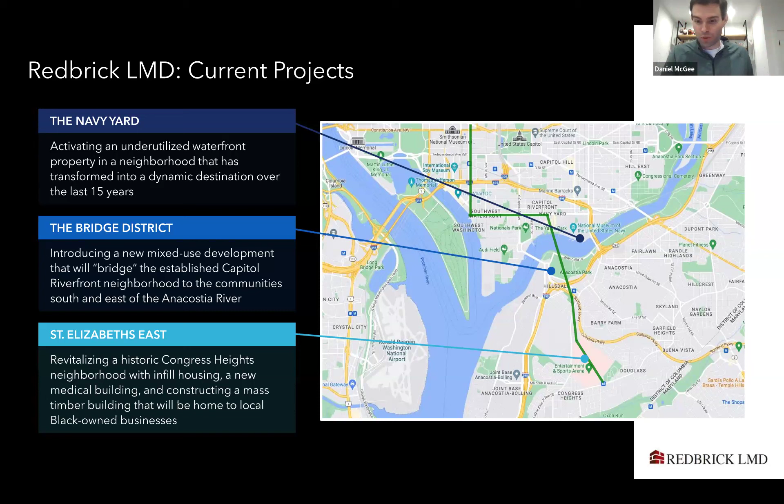I'm going to be speaking solely about Bridge District today. We have other people on my team who would be more appropriate to speak about St. Elizabeths East and Navy Yard, but they're fascinating case studies as well. Feel free to go check out St. Elizabeths East. The new Sycamore and Oak Mass Timber Pavilion is a really cool example of some work that we're doing. But today we're going to talk about the Bridge District.

This is a 757 unit multifamily residential building we're building to a zero carbon standard. It is under construction right now. We're going to top out the structure in May, so I think we're on floor 9 or 10 of 12. And it's right on the landing of the new Frederick Douglass Memorial Bridge.

And we're building this to a zero carbon standard from a total life cycle approach. What I mean by that is we're going to fully account for the carbon emissions throughout the project's entire life cycle, not just the part that we own and operate. We're taking responsibility for the carbon emissions that occur all throughout that life cycle.

We take a reduction first approach, so anywhere we see carbon emissions, we're trying to reduce as much as possible. And then lastly, we're going to offset those emissions, the embodied carbon generated through completion of construction, through a one-time offsetting project. And then from then on, all the operational energy will be powered 100% by renewables.

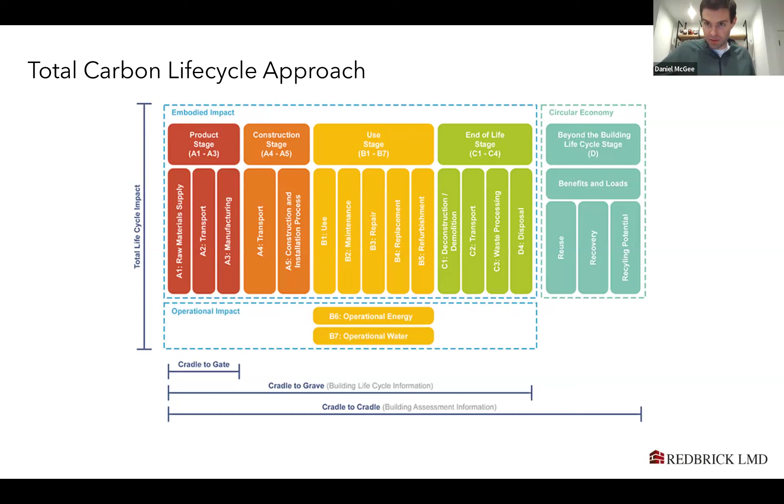In raw data, but we found that while there are some databases out there that have some estimates, we wanted to further those databases with real primary data, so we can educate ourselves on how much emissions are actually generated during this process, but then feed that back into the databases to make those better. I'm going to first talk about the embodied emissions - emissions generated from cradle, raw materials, all the way through construction of a finished building.

We're tracking a 30% reduction in overall embodied carbon emissions relative to an EC3 baseline, which is one of those baselines I talked about that has good industry data, but like I mentioned, we're looking to make those a bit better. The big movers here: concrete, steel, your building envelope, and then your interior finishes. Those are the categories we really honed in on in our attempt to reduce these emissions.

While we achieved a 30% reduction, this was us throwing almost everything at the wall for a building of this type - it is concrete construction. In future phases of our bridge district development, we're looking at trying to replace concrete with other structural materials like mass timber or carbon capturing concrete. We're going to continuously try to learn from this one and push that reduction even further. But this was kind of us throwing everything at the wall, and I think we're at the physical limits of what we can do, given current technology and this construction type, which are two big caveats to that statement.

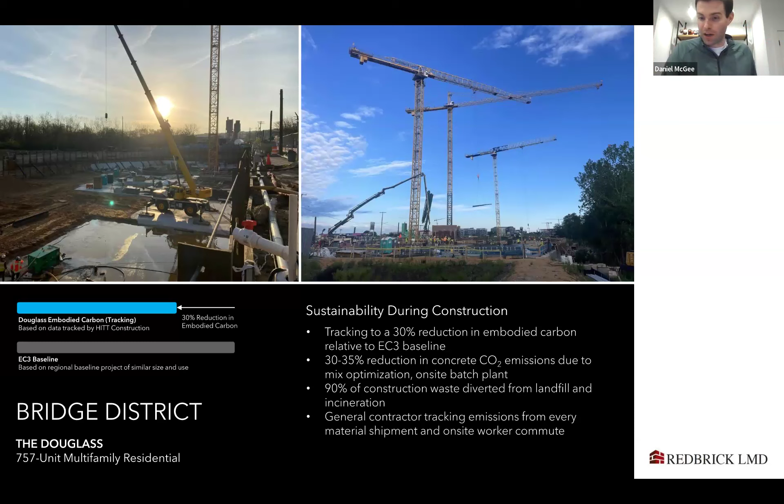Like I mentioned, once we track all of this embodied carbon, we are going to invest in an offsetting project to offset that amount of carbon. I talked about the concrete - one of the strategies for our embodied carbon reduction was to really optimize every single concrete mix that we put onto this job.

In the process of creating cement, the cement production process is very carbon intensive, and so we made moves like replacing the limestone that we use in that cement process with a byproduct slag, which is an iron manufacturing byproduct, as well as putting the concrete production right next to our site.

We do have the luxury that we have a couple acres right next to our site that we were able to put a batch plant on. And what that allows us to do is reduce the transportation emissions that are caused by trucking the concrete.

Imagine a building of this size, and how many concrete trucks need to come through. But mixing on-site also allows us to fine-tune the mix exactly to what we want. So if we need to hit a certain strength of concrete, since we're mixing it right there, that allows our concrete subcontractor to hit that exact mix. We don't need to use as much cement as we otherwise would, which reduces our concrete's footprint.

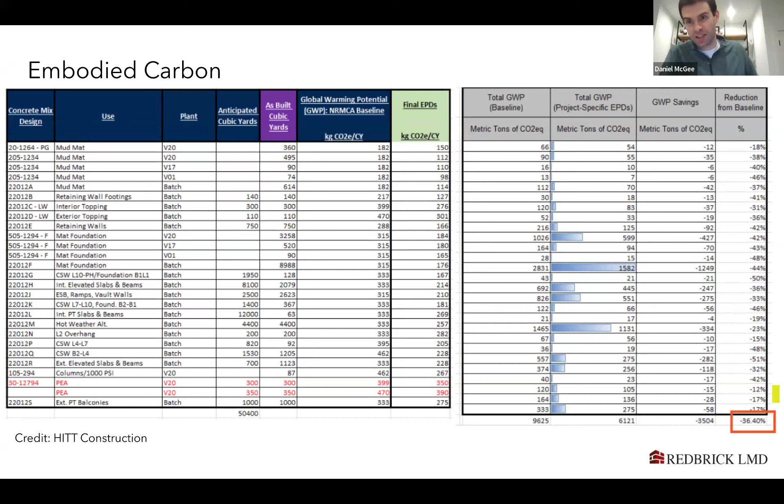This project has multiple pages showing the different concrete mixes we have on site. This was generated in partnership with our concrete sub, to push the envelope as much as we can on trying to reduce our embodied carbon. This results in us emitting 36% less carbon emissions relative to typical concrete.

Here's a bit more detail, continuing on what I was talking about - we're tracking to a 36% reduction in concrete. Steel is another big category. We were able to achieve a high reduction in steel by finding steel plants that use an electric arc furnace rather than fossil fuel burning.

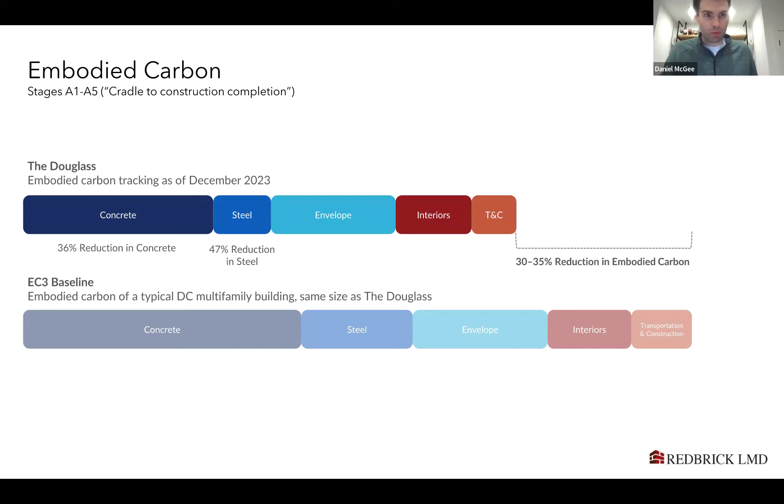We are still in the process of buying out a lot of our envelope interiors, and the transportation and construction. Once this project is done, I'd love to come and present the final numbers, and we will certainly be providing this level of information publicly. We're currently in the process of finding reductions there.

Now, once the building's opened, there's an operational component to the emissions we generate, pretty tied to our energy use. A big goal was to reduce the operational energy as much as possible. We were able to achieve a 44% reduction in operational energy, as modeled relative to the DC multifamily median.

Based on the benchmark performance standards given to us in DC, some other key things to note: this building is fully electric. There's no on-site combustion sources, with the exception of a life safety backup generator, which is a natural gas generator, but no combustion sources under normal operation.

Relative to an ASHRAE 90.1 baseline, we're designed to be a 30% reduction to that 90.1 baseline model. I did mention we will be powered 100% by renewable energy, a combination of on-site and off-site sources. We will be loading up the rooftop with solar panels.

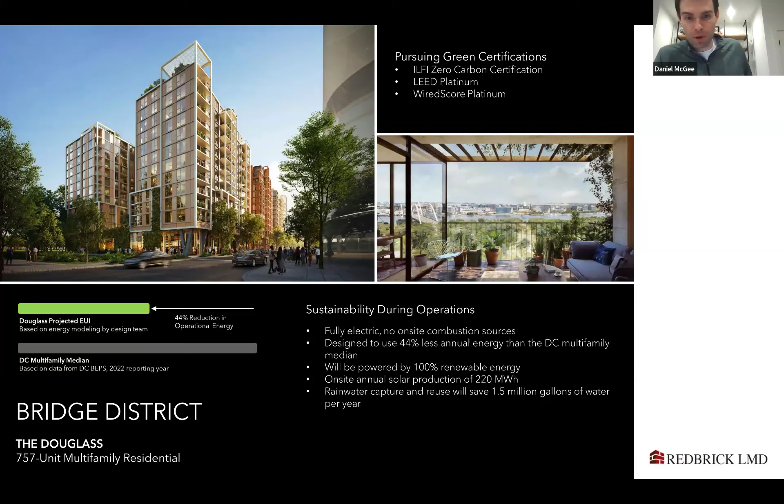I want to stress that to get these operational reductions down to these numbers, you don't need to go extreme on every single system type or every envelope detail that you build. It's really all about modeling out and finding the point of diminishing returns on each of these.

So you study, say, the window U-value - going from single pane to double pane might make a lot of sense and have impact, but going from double pane to triple pane might cost a lot and you start to see diminishing returns. It will be better energy performance, but diminishing returns, where I'd rather spend that money on other energy saving measures. Once you find this nice combination, there's a compounding effect between them, so you don't need to go to the extreme edge of every single one.

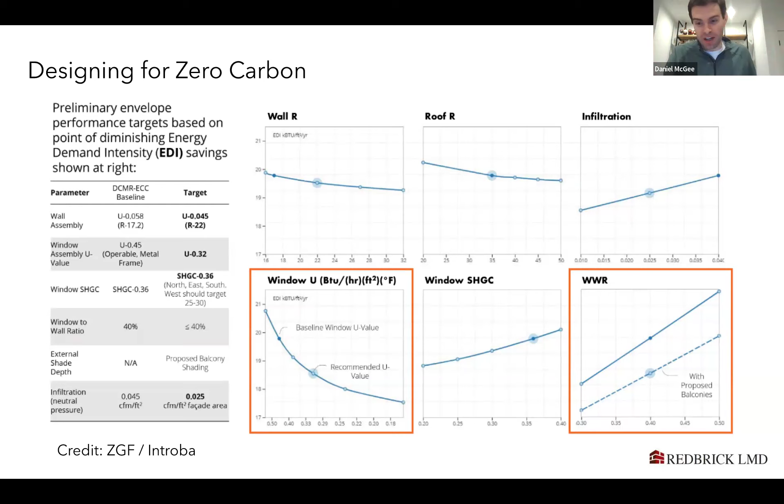And we were able to get this - we've been tracking, hey, what if we just didn't care about energy use and just built to code standard? We were able to get this to within a single-digit percent cost increase relative to that minimum code standard. Granted, DC code is pretty aggressive - a code minimum building will probably achieve something like LEED Silver just off the bat. But it's still not that much more expensive than that kind of meeting-code building.

One of the key ways that we achieved this is by connecting every single thermal load in the building - your apartment heating, air conditioning, your domestic hot water.

All the refrigeration equipment too. Atlas Brew Works will be moving in as an anchor tenant in this building, and they're going to be brewing beer on the first floor. That equipment is linked into this thermal loop we've created, so it's kind of cool that the heat rejected from the beer making process will go directly into the residents' hot water.

And so by sharing all these energy loads, we can move heat where it's not wanted to where it's wanted. And we are looking at potential...

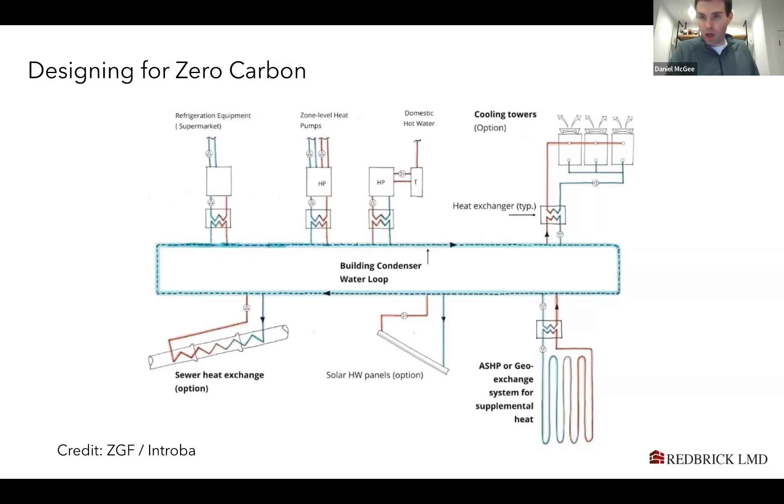...a sewer heat exchange system on a bit more of a community scale. It's not going to be part of this construction of the project, but once we build out some more of these buildings, we're going to look to create some sort of thermal loop on a community scale at the Bridge District.

And then here's kind of the summary of the categories of energy use in this building, based on a typical multifamily median building. Really the big thing is we were able to reduce our domestic hot water load, specifically because we're taking heat from other areas and using heat pumps to get that heat into where it's wanted on the heating hot water side.

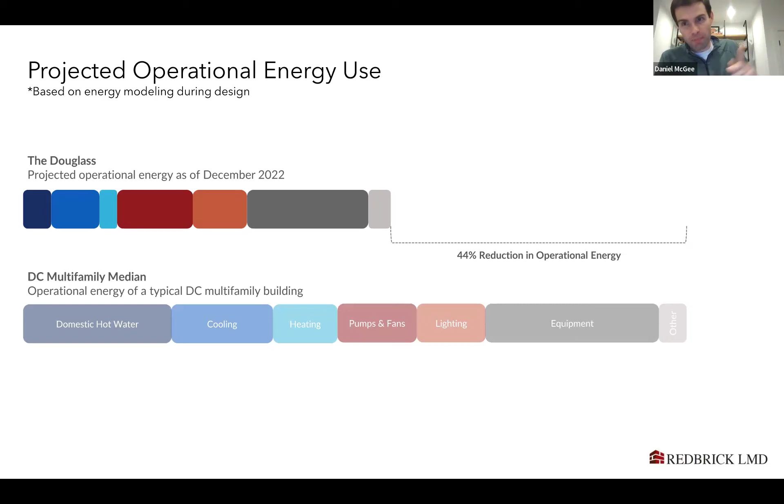Like I mentioned, this is a 44% reduction in operational energy relative to a DC multifamily median. Relative to an ASHRAE 90.1 baseline, we're looking at a 30% reduction.

And then lastly, the last thing I'd like to talk about is, why are we doing this? It's really our core belief that responsible development goes hand in hand with long-term value creation.

All of the land on the Bridge District is an opportunity zone, and as part of that there are tax incentives, but we are required to own and operate that building for a minimum of 10 years. We're looking even longer than that.

But that's really helped us think through, if we're going to be owning these buildings that far into the future, how do we future-proof this asset in a way that it's not going to be obsolete when we go to eventually sell the building?

And we see some of these long-term macro trends happening, some of which are already happening. For example, we think residents, companies and institutions will require that their built environment matches their values, either through an explicit or implicit example, as I've shown there.

Carbon taxes are coming in a lot of areas. DC has it in the form of a building performance benchmarking standard. New York City has Local Law 97. It's happening sooner rather than later.

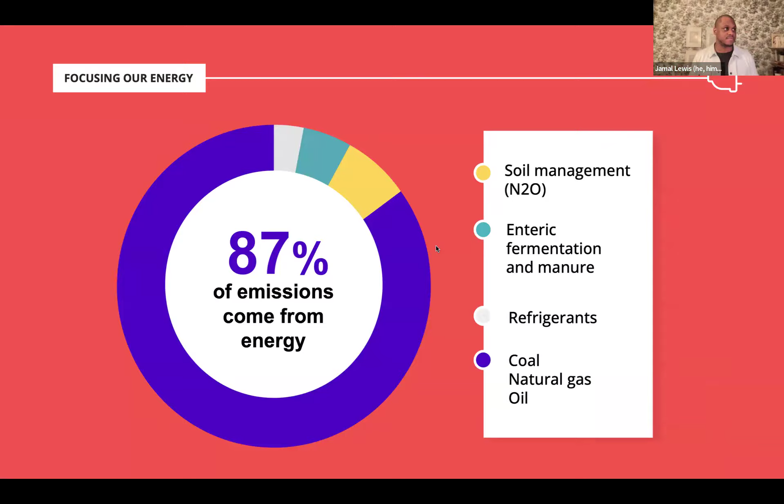So yeah, we were founded on the premise that 87% of our country's emissions come from the energy sector—generating power, using power, distributing power and energy. 87% of our emissions comes from that sector. And 42% of those emissions comes from decisions that consumers make.

So you can see from the pictures here, as consumers, for the most part, we have the power to choose how we're heating and cooling our home, how we're heating and cooling the water in our home, what we're using to cook, where we're getting our power from. Increasingly, we're able to choose that also, and how we're drying our clothes. These are all things that we have the power to influence and to change. And almost half of those emissions comes from these decisions.

So I think it's the idea that addressing climate change for a long time has been this large, really overwhelming idea. And at least for me, it's been really hard to imagine how a simple person like me could address the climate crisis. But we can make a significant dent by just addressing what we can control, which is choosing these types of machines.

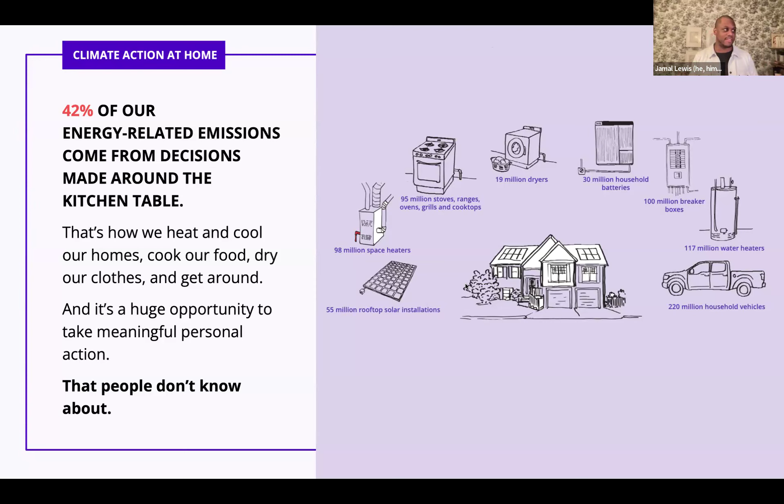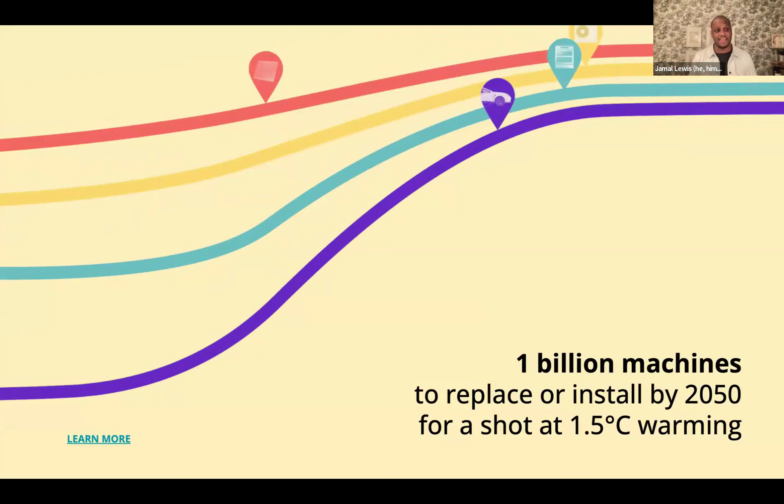What does that mean in aggregate? So in total, we did a projection and estimated that in order to have a shot at 1.5 degrees, which is what came out of the climate accord and what President Biden's climate goal is, we really need to be switching out or installing 1 billion machines by 2050, and that really gives us a shot of meeting those climate goals.

So about 6 months ago we put out a report called the Pace of Progress, which you can find on our website. And when you think about 1 billion machines that we have to install or replace by 2050, it's not as salient. It's how do we make that more accessible?

So what we did is projected what the year-over-year progress needs to be in order to get to that number. In total, these numbers are in thousands. You can look at some of the year-over-year installation and/or replacements that need to happen in order for us to meet our climate goals.

So for heat pumps, which is the efficient electric way of heating and cooling our home, between 2024 and 2026 across the country, we need 10,164 thousand replacements or installations. So as a general mantra, we're hoping to make climate action way more accessible for everyone involved.

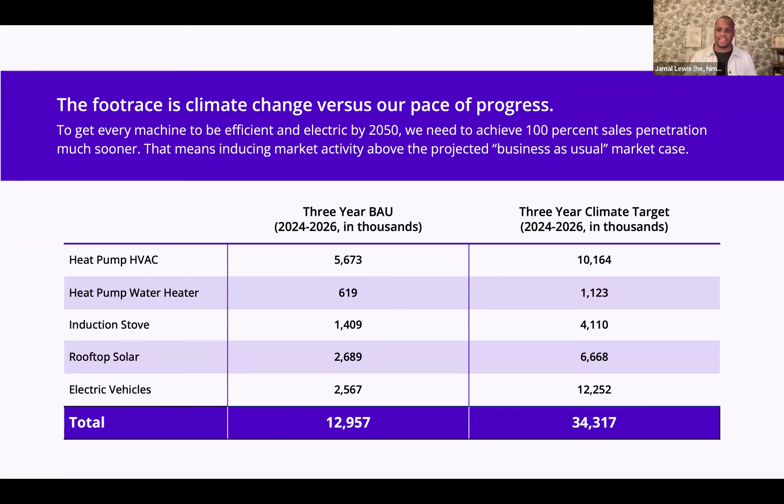So that's how we were founded and sort of what we're hoping to get to with our work. Effectively within the decade, we're working to make sure that efficient electric machines are the most affordable and the most accessible machines on the market. So if you're looking to buy a new car, the most affordable and accessible version of that is an electric vehicle. So if you go to the dealership, we want it to be a no-brainer that you choose these more effective and more efficient machines.

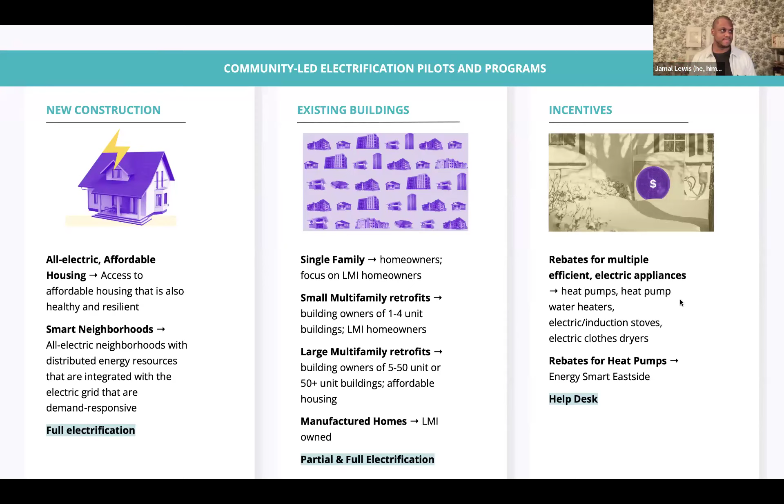Yeah, and so for all of you that are less policy inclined and want to take action yourself or learn more, if you're electrification curious still, as if I hadn't already convinced you, we've got this website called homes.rewiringamerica.org with a lot of consumer content. It also includes our personal electrification planner that we just launched last week or two weeks ago—the days are blending together. At some point in the last month we released something called the Personal Electrification Planner that helps you map out your own personal electrification journey. So that's there. And then we've got a whole bunch of consumer content on stoves, induction, and a whole bunch of other things. So check that out, join us.